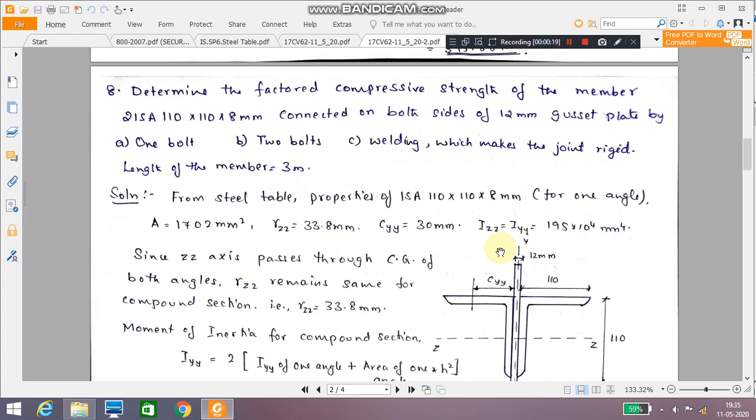Hello, dear students. We will continue with the problems of design of compression members. Determine the factored compressive strength for the member made of ISA 110 by 110 by 8 mm connected on both sides of a 12 mm gusset plate. There are three categories: one bolt, two bolts, and welding, which makes the joint very rigid. The length of the member is 3 meter.

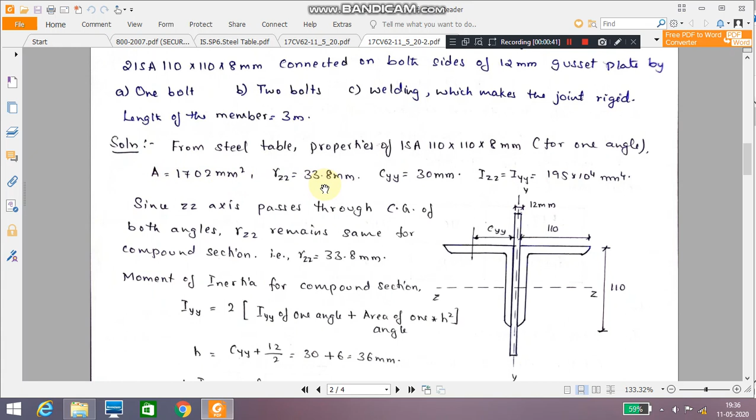So now from the steel table we can get the values for ISA 110 by 110 by 8 mm. For one angle we will get, later we will multiply with 2. So A equal to 1702 millimeter square, RZZ equal to 33.8 millimeter, CYY equal to 30 mm, IZZ or IYY equal to 195 into 10 raised to 4 millimeter raised to 4. So this is the compound section here.

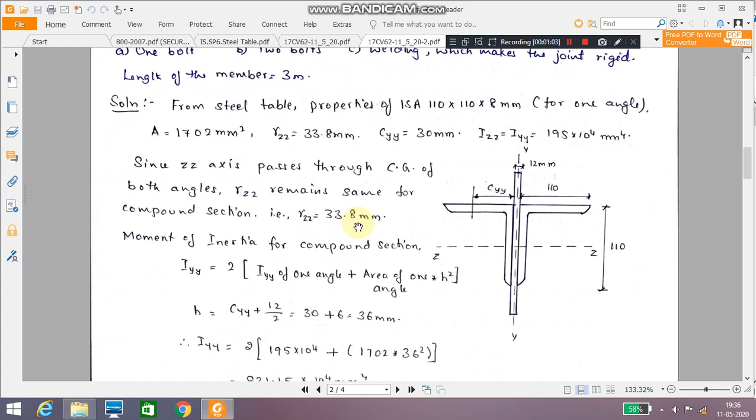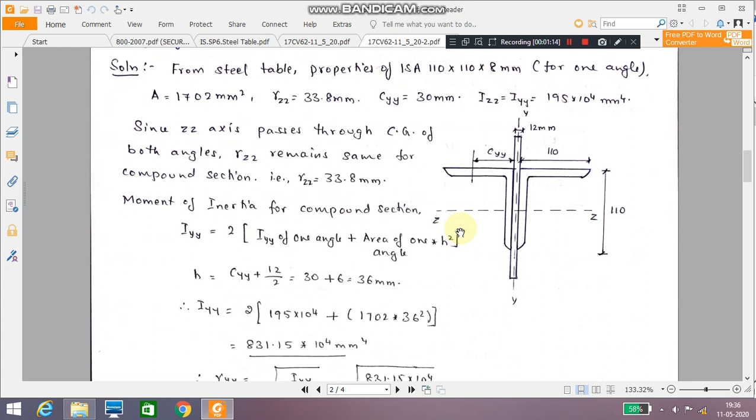Since the ZZ axis of the compound section passes through the CG of both angles, RZZ will remain the same for the compound section also. Therefore, RZZ equal to 33.8 millimeter only. No need to cross check it again. Therefore, moment of inertia for the compound section IYY equal to 2 into IYY of the one angle plus area of one angle into H square. So upon substitution, we get 831.15 into 10 power 4 millimeter raised to 4.

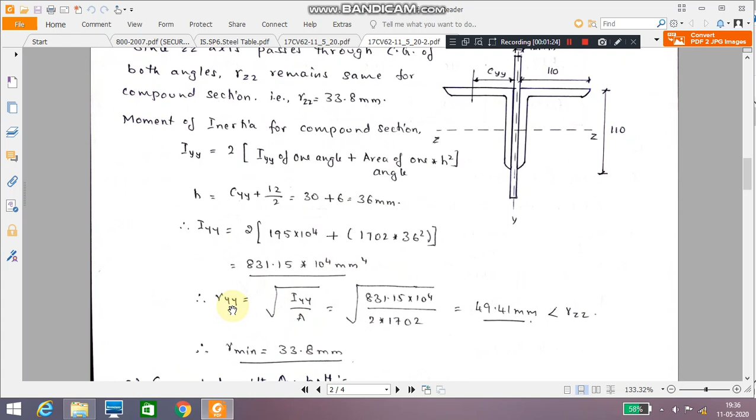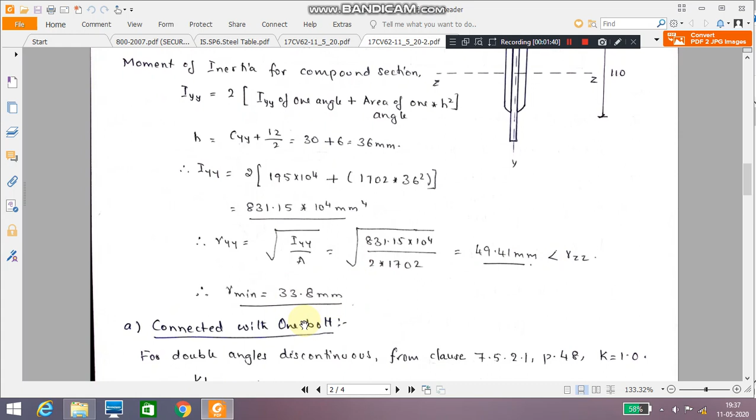Therefore, RYY equal to 49.41 millimeter, which is greater than RZZ. It should be greater than RZZ. Therefore, R minimum equal to 33.8 mm. Now, let us take all the three cases.

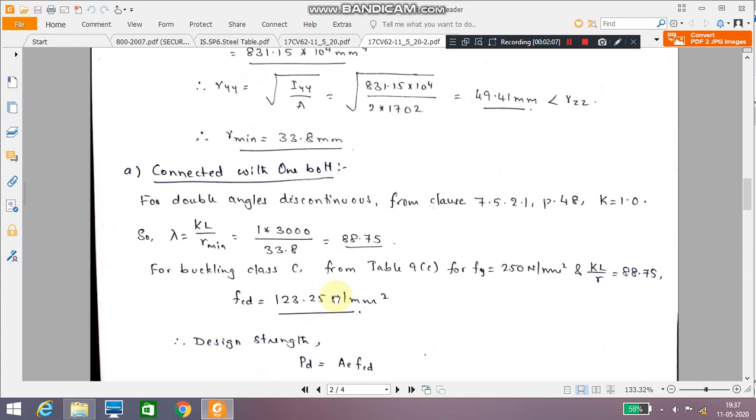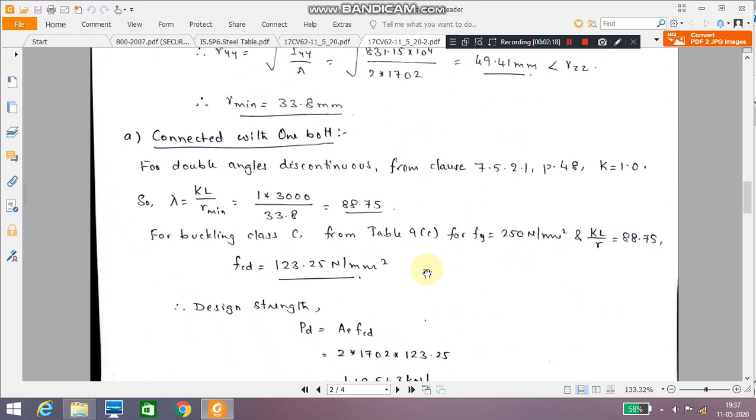In that, let us take first case connected with one bolt. So, when you have this connected with one bolt, for double angle discontinuous from clause 7.5.2.1, we can take k equal to 1. So lambda equal to KL divided by r minimum. So 1 into 3000 by 33.8, that is 88.75. So let us take buckling class C from the table 9C for Fy equal to 250 Newton per millimeter square and KL by R equal to 88.75. The FCD value works out to be 123.25 Newton per millimeter square.

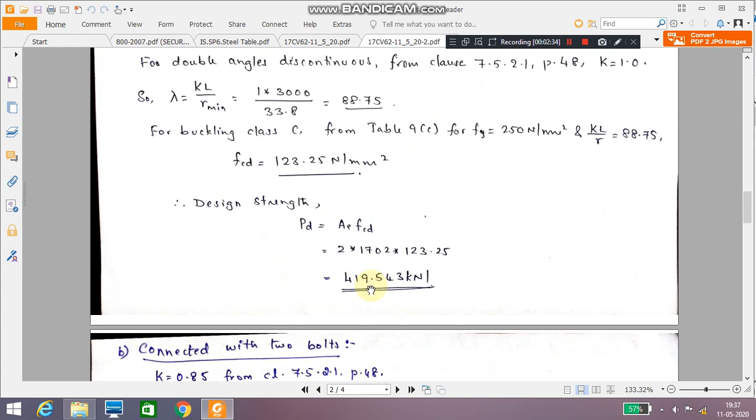Therefore, the design strength PD equal to AE into FCD works out to be 2 times 1702 into 123.25 works out to be 419.543 kilonewtons. The second case, connected with the two bolts.

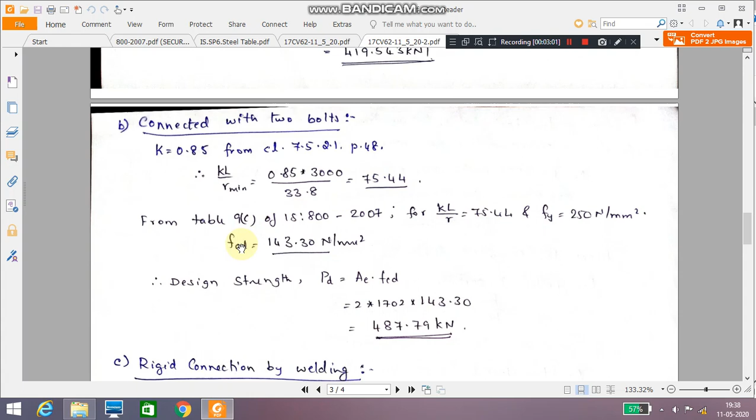Now what is the difference? Let us see. So k equal to 0.85 we have to take whenever it is connected with the two bolts for a discontinuous type of columns or angles. So here KL by R minimum equal to 0.85 into 3000 by 33.8 equal to 75.44. Therefore, let us calculate from table 9C for KL by R equal to 75.44 and Fy equal to 250 Newton per millimeter square. It is 143.3 Newton per millimeter square. Therefore, PD equal to 2 into 1702 into 143.3 works out to be 487.79 kilonewton.

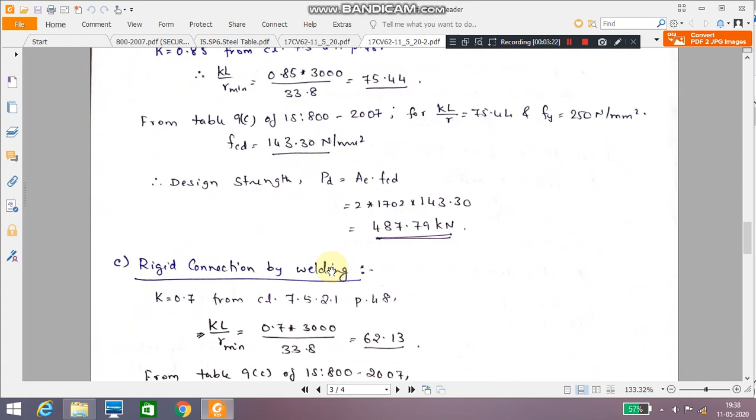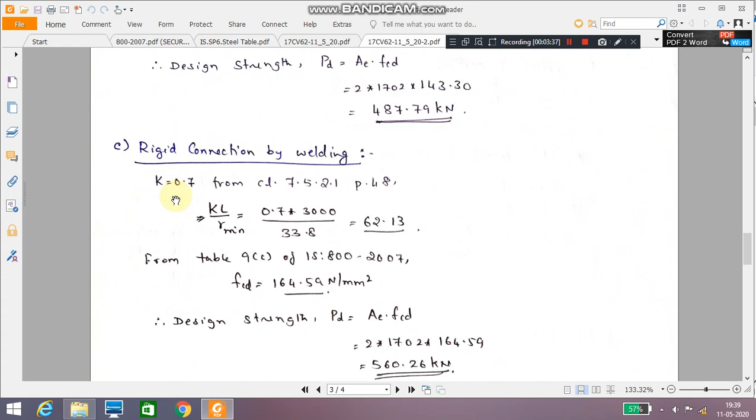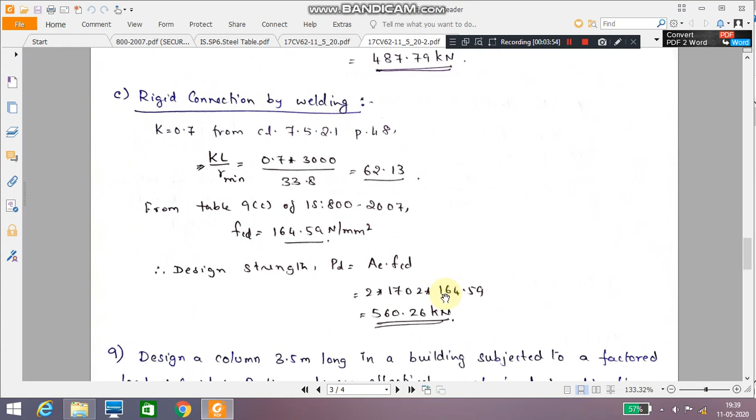So now last case in this, that is rigid connection by welding. Whenever you have the welding as the connection, you can take k equal to 0.7 from the clause 7.5.2.1, page number 48. So KL by R minimum equal to 62.13. From the table 9C you can get FCD equal to 164.59. You need to interpolate. Therefore, the design strength PD equal to AE into FCD, that is 2 into 1702 into 164.59 equal to 560.26 kilonewton.

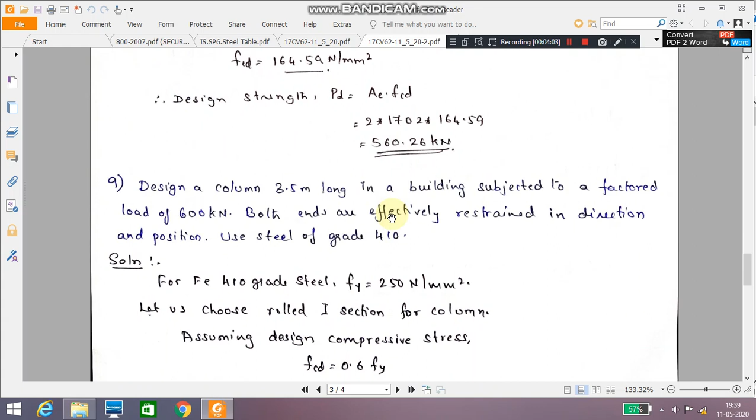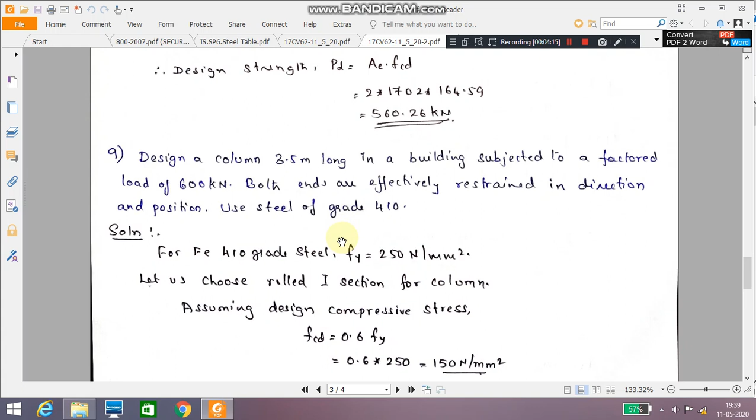Let us take one more problem. Design a column 3.5 meter long in a building subjected to a factored load of 600 kilonewton. Both the ends are effectively restrained in direction and position. Use grade of steel equal to 410. So 410 grade in the sense Fy equal to 250 Newton per millimeter square.

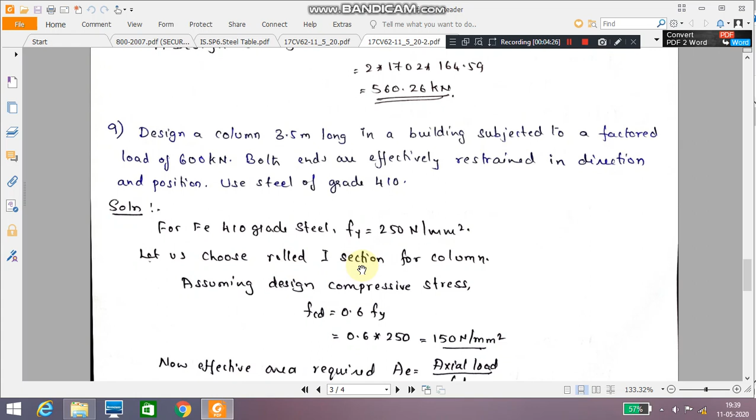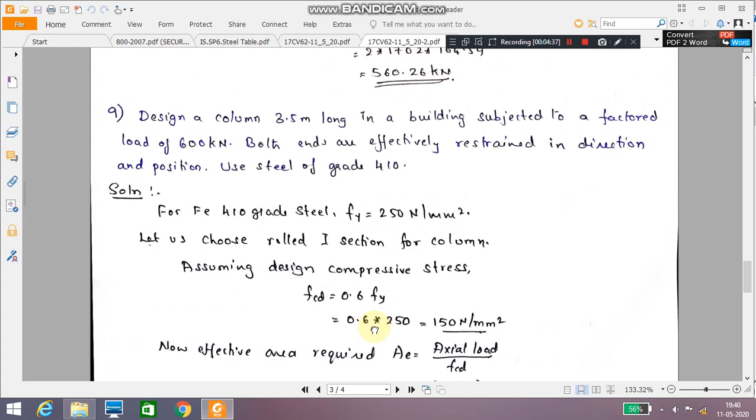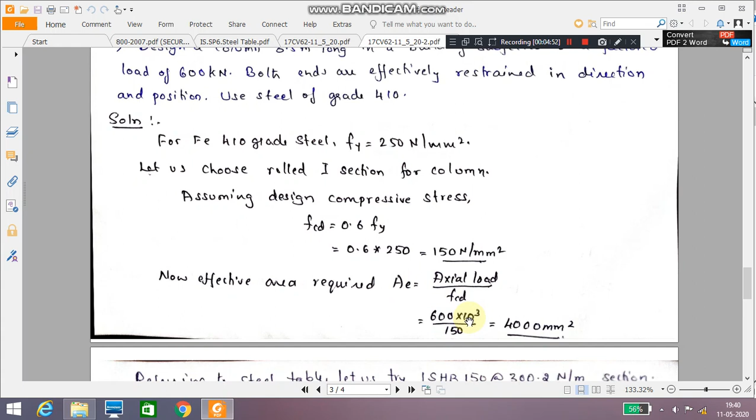Now always whenever you get this type of questions, always you go for I sections. Let us assume the design compressive stress FCD equal to 0.6 times Fy. This one also you have to remember, FCD can be taken as 0.6 times Fy. So 0.6 into 250, 150 Newton per millimeter square. Now the effective area required AE equal to axial load by FCD. That is nothing but load by stress equal to area, because stress equal to load by area. So 600 into 10 raised to 3 divided by 150 equal to 4000 millimeter square. So in this problem they have given the factored load itself, therefore I have taken the factored load here.

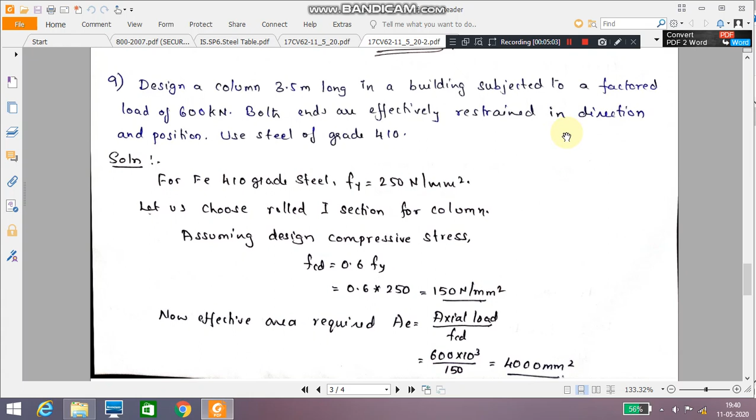If the working load is given, then you have to convert it into factored load and substitute here. Factor of safety for load is 1.5. Referring to the steel table, let us try ISHB 150 at 300.2 Newton per meter section. That means selecting a section whose area is very near to the required area. The required area is 4000. The area of ISHB 150 at 300.2 Newton per meter is equal to 3898 millimeter square.

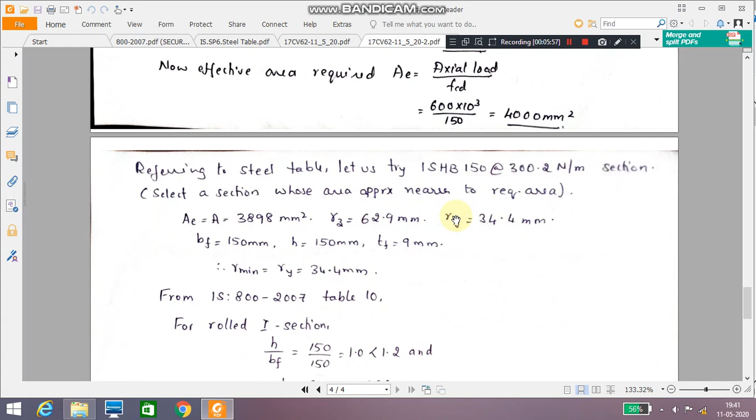From the steel table again, Rz equal to 62.9 mm, Ry equal to 34.4 mm, Bf, the width of the flange, equal to 150 mm, height or depth of the section equal to 150 mm, and thickness of the flange equal to 9 mm. Therefore, R minimum will be equal to the minimum of these two, that is 34.4 mm.

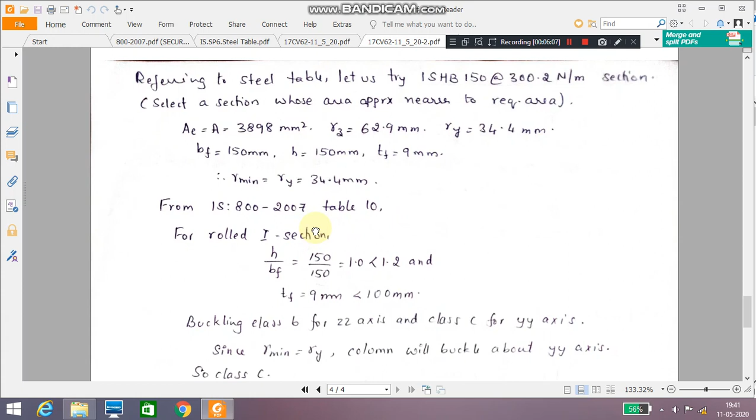Now from table 10 of IS 800-2007, I have to choose the buckling class. For the buckling class, for a rolled I section, I have to find the H by BF ratio. So let us look into table 10 here. In table 10, if H by BF ratio is greater than 1.2, then you have to find these two. If H by BF ratio is less than or equal to 1.2, then you have to check for these two.

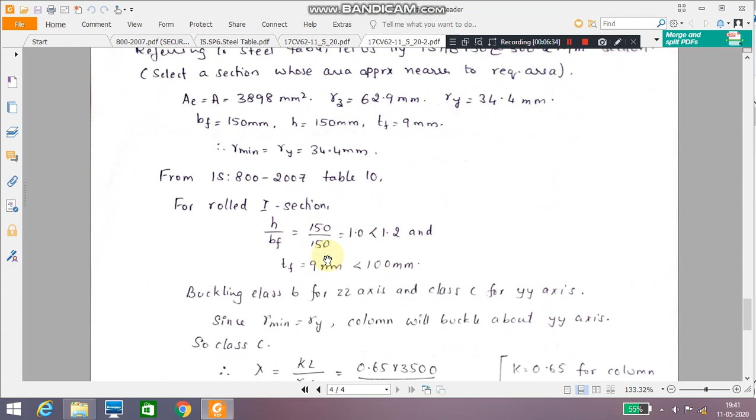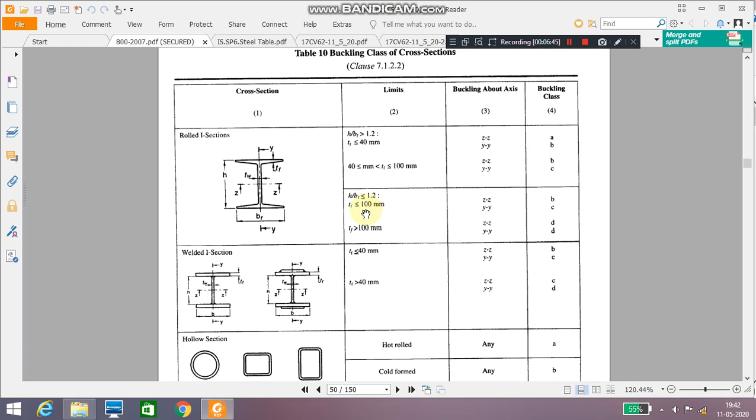So here H by BF ratio equals 150 by 150 equals 1, which is less than or equal to 1.2. This is the case I have to check. And the thickness of the flange here is 9 mm, which is less than 100 mm. So the buckling class is B for ZZ axis and buckling class C for YY axis.

Therefore, since R minimum equals Ry, the column will buckle about the YY axis only. For whichever axis the radius of gyration is the least, it will buckle about that particular axis only. So about the YY axis it is class C. Therefore I have to go for class C.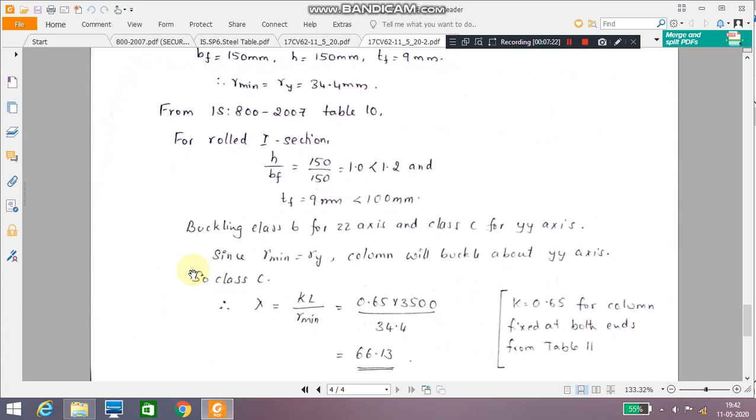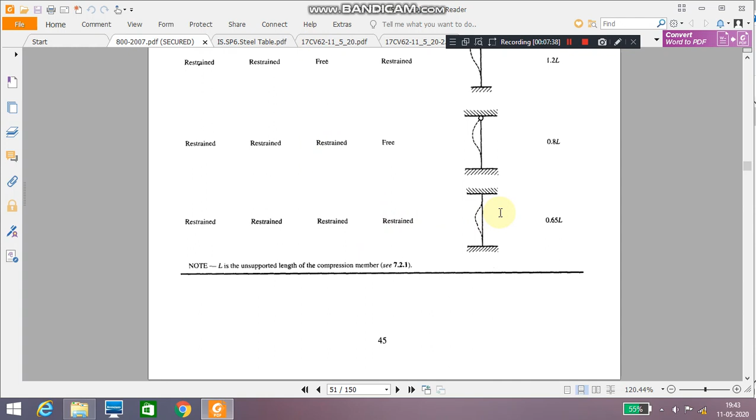Therefore you calculate lambda equal to 0.65 into 3500 divided by 34.4. From table 11, for both ends fixed, both restrained against rotation and translation, 0.65 L is the effective length. So lambda works out to be 66.13.

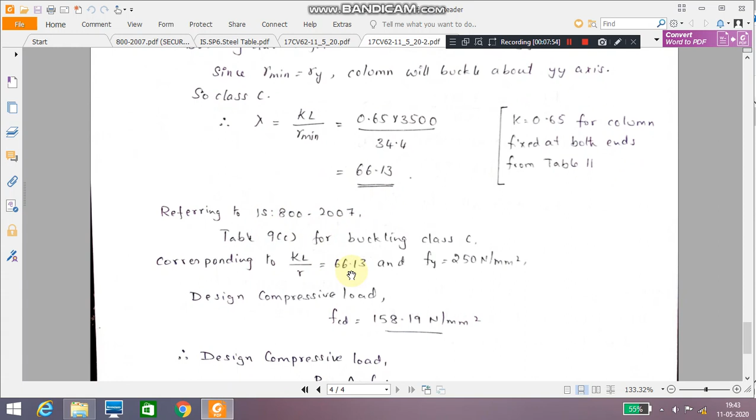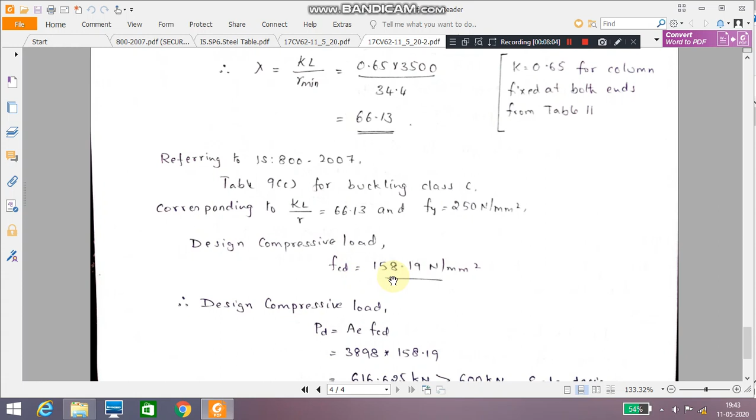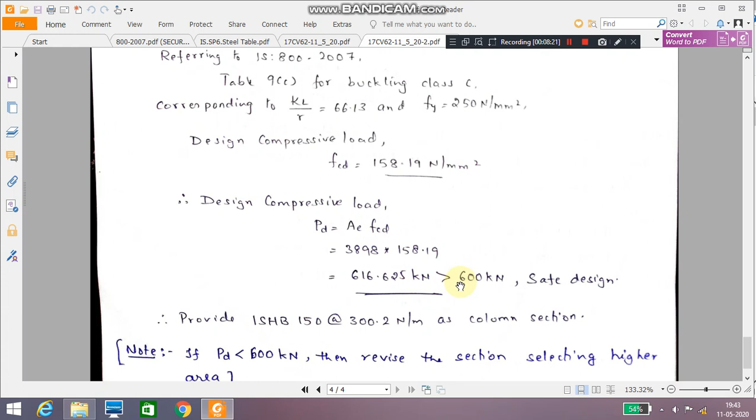Now let us refer to IS 800-2007 for buckling class C, from table number 9C, for the corresponding KL by R equal to 66.13 and Fy equal to 250 Newton per millimeter square. The design compressive stress FCD equals 158.19 Newton per millimeter square. Therefore, design compressive load PD equals AE into FCD, that is 3898 into 158.19, that is 616.625 kilonewton, which is greater than the factored load. So the design is safe. Therefore, let us provide ISHB 150 at 300.2 Newton per meter as the column section.

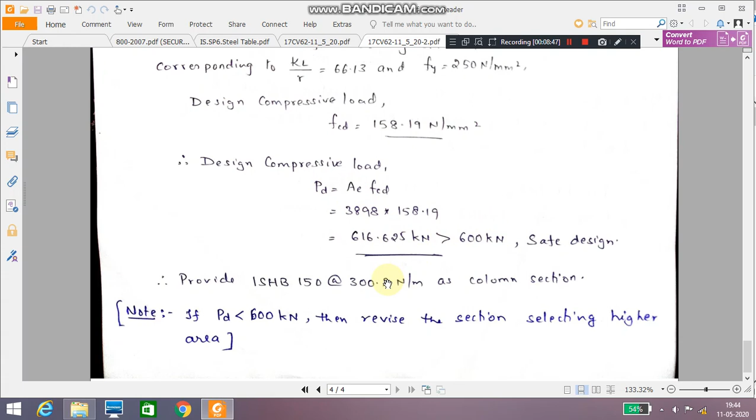Now a few considerations you have to be very careful about here. Suppose after all this calculation, the PD value works out to be less than 600 kilonewton, the factored load. Then you need to revise the section by selecting a higher area. This is how you can design the column section for the given data. In the same way, they can ask a few more problems by changing the length, by giving the working load or simply the load, or by changing the end condition.

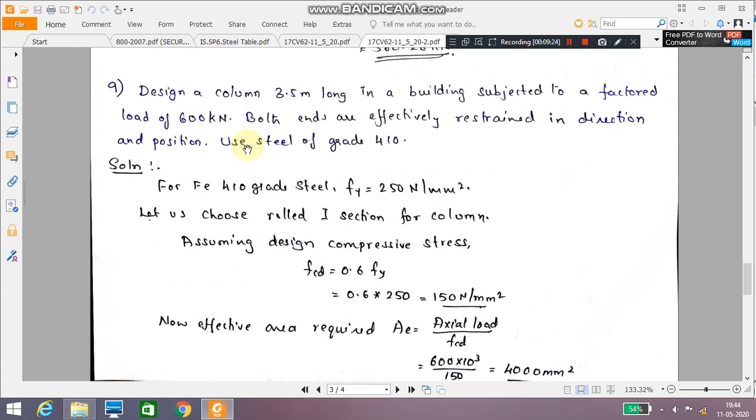They may give both ends hinged, one end fixed and one end hinged, or one end fixed and the other end free. For all those boundary conditions you have to refer to table number 11, and you also have to choose the buckling class from table number 10. This is how we can solve a few problems under design of columns or design of compression members. For this video lecture, this is sufficient.

In the coming video lecture, we will take up a few more problems on design of struts. After that, we will go for lacings and battens. The built-up sections also we will take in the coming video lectures.